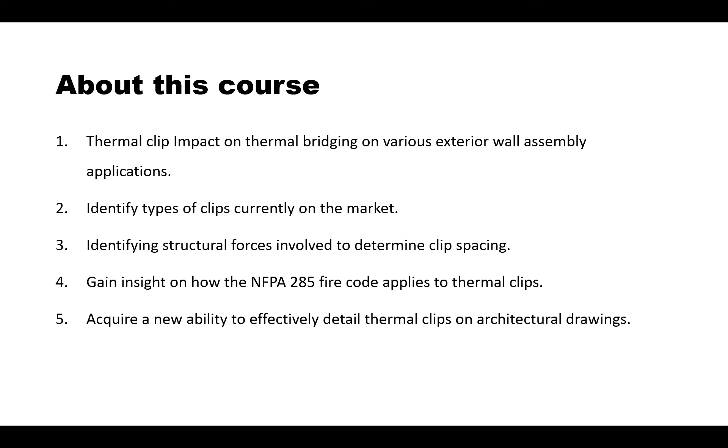My name is Bilal Khan, and I am an architectural product consultant at Northern Facades. I really like to look at myself as a resource to architects, designers, and engineers with all things related to facades. Given my background, I really enjoy solving problems and getting into the details. I hope you all have a great session through this presentation and find value in the things that we've learned throughout the years.

So I want to start off the presentation with just creating a little bit of context.

88% of energy sources are non-renewable and harmful for the climate. This is just a synopsis of where energy is currently being sourced in the United States. And as we all know, if our energy is not renewable, it could cause adverse climate change effects that we're all experiencing, such as snowstorms in Texas, etc.

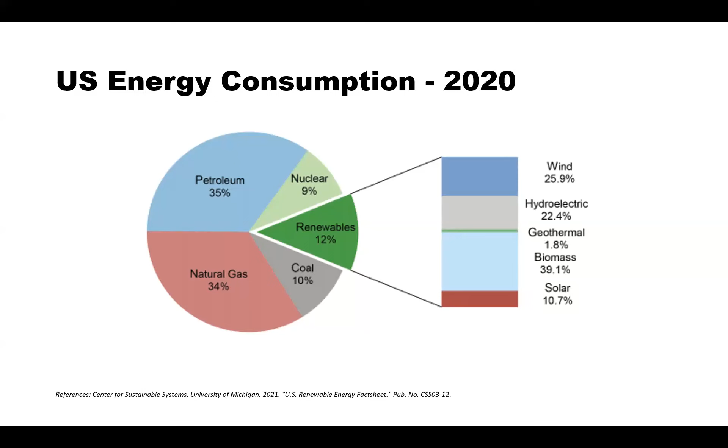Buildings that we live in require energy for all kinds of different things, ranging from cooking and refrigeration, running motors and electrical devices, or even lighting. But the single biggest end use is space heating, which accounts for 42% of residential buildings and 36% for commercial buildings. Commercial buildings also spend $27 billion, or 15% annually, just to heat their buildings.

All of this data is just to create this sense of understanding of how our energy is being sourced or produced, and how we consume it. Given that, we would want to believe that building occupants would be pretty happy or satisfied with the thermal comfort of their buildings, right?

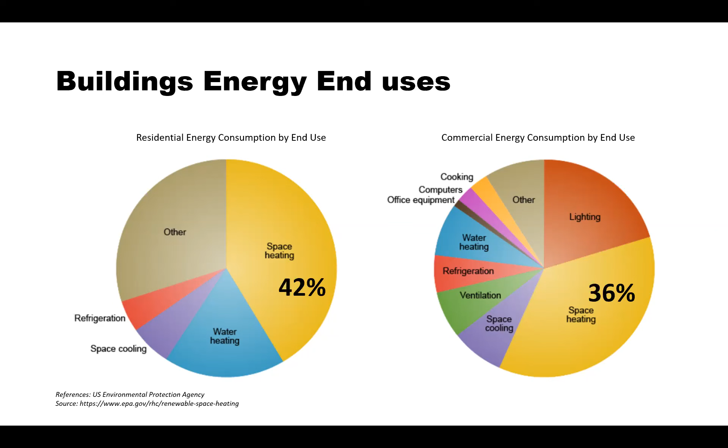However, we stumbled upon a survey that says no, that's actually not the case. Actually, thermal comfort is in a negative or dissatisfied zone. In a study conducted at UC Berkeley, we learned that modern building performance is mediocre at best.

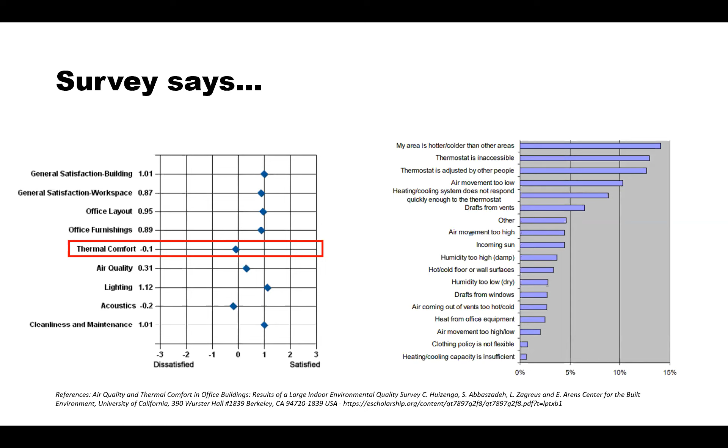If you look closely at the sources of dissatisfaction with temperature, we see opinions like 'my area is hotter or colder than other areas,' or 'air movement is too low,' or 'heating and cooling systems do not respond quickly enough' — all telltale signs of overall failure of the building to maintain temperature consistency. This leads us to believe that buildings are perhaps not performing at the level they were designed to, or if they were even designed to a standard, and that most commercial buildings are experiencing drastic heat loss.

So before we understand how buildings lose heat, we need to understand TEDI, or thermal energy demand intensity. TEDI is a measure of the amount of annual heating energy needed to maintain a building's stable interior temperature. It takes into account heat loss through the envelope and passive gains such as warmth generated by sunlight, body heat, and appliances. By targeting low TEDI, designers can focus on passive solutions like good insulation, air tightness, and beneficial sun angles that can help reduce energy used directly.

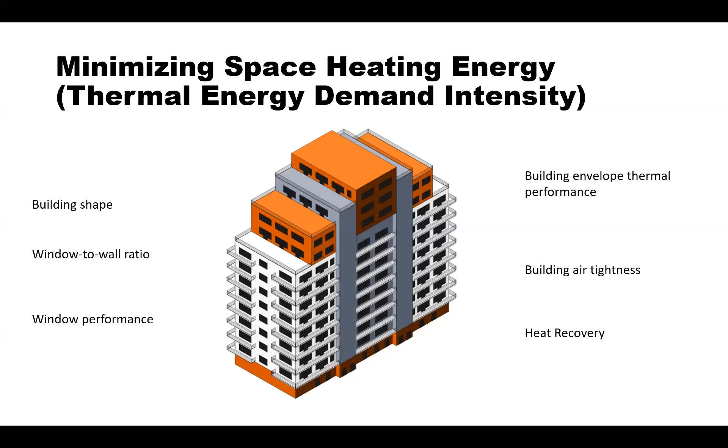Looking at these passive design aspects is always the first step in high performance design. To minimize heat loss from buildings, it's very important to design highly insulated buildings and building assemblies, with more exterior insulation or split insulation in wall cavities. But either of those two strategies fail if we fail to recognize the impact of thermal bridging across the building envelope.

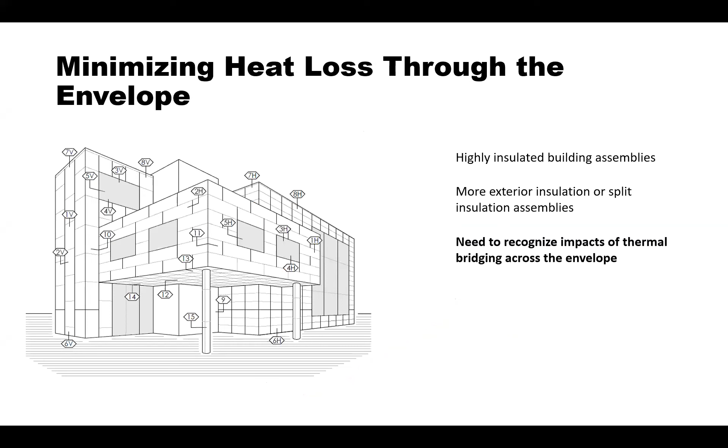So let's take a closer look at what thermal bridging entails. This is mostly a refresher, as I'm sure everyone present at this webinar knows what thermal bridging is, but for context: a thermal bridge is an example of heat transfer through conduction, plain and simple. When there is a temperature difference, heat flow will follow the path of least resistance through the material with the highest thermal conductivity and lowest thermal resistance. This path is a thermal bridge.

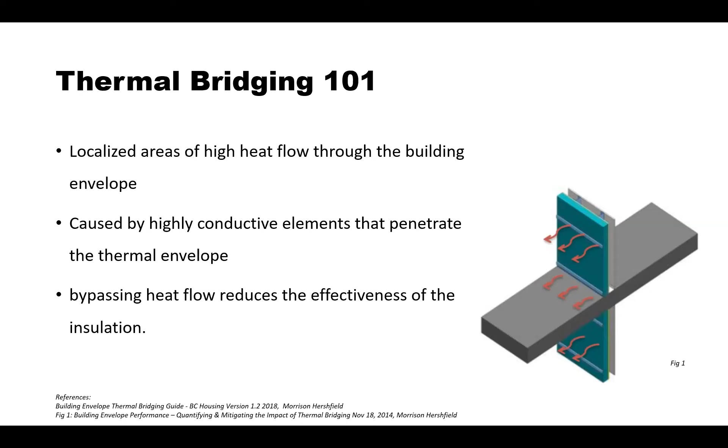Thermal bridging is caused by highly conductive elements penetrating the thermal insulation, or misaligned planes of thermal insulation. These paths allow heat flow to bypass the insulating layer and reduce the effectiveness of the insulation.

Thermal bridges can occur through walls, roofs, and other insulated building envelope components through linear transmittance of floor slabs, through point transmittance of structural elements, and clear field assemblies — that is, transmittance which occurs due to the effect of uniformly distributed thermal bridging components like brick ties, structural framing, products like steel studs or studs in general, and cladding attachments.

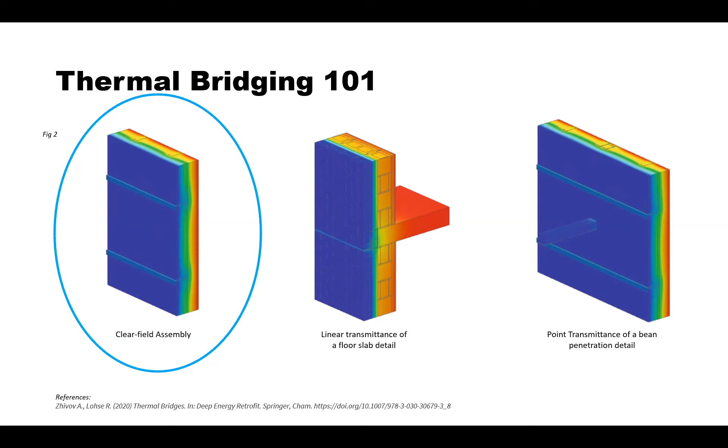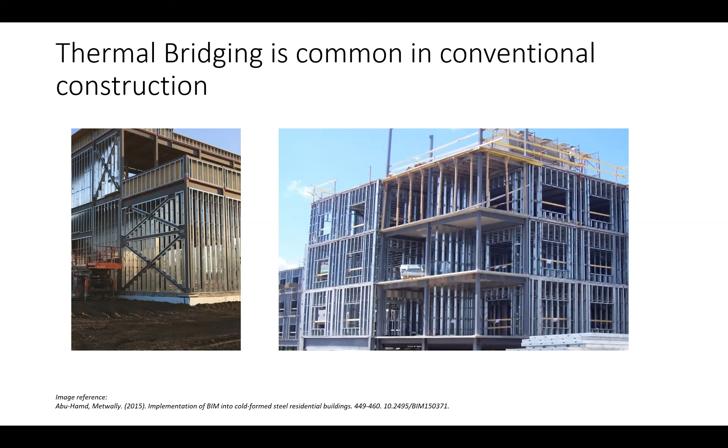This presentation is going to focus exclusively on thermal bridges created through a clear field assembly. Thermal bridging is common to many forms of conventional construction. Prior to detailed studies of thermal bridging in building enclosures, assembly designers did not necessarily pay attention to heat flow by conduction through steel studs and reinforced concrete structures that did not benefit from continuous exterior insulation. One of the best ways by far to suck energy across the wall is a steel stud.

Just look at the configuration. It's a highly conductive material that's designed for maximum absorption on one end and maximum emission on the other end. And it really doesn't get any better than this for heat loss or heat gain.

Whether this assembly is insulated internally from a thermal perspective is irrelevant, as there are studies conducted where we see steel stud walls with no stud cavity insulation compared to a wall with cavity insulation. When we compare them, you would not be able to tell the difference in thermal performance between the experimental area of measurement. Hence, the case made for exterior insulation has more legs to stand on than we think.

Here's another look at the thermal bridge. Now you can see how the path of thermal transfer goes from the steel studs from the inside of the building via continuous Z-girt. And the only way efficiently and effectively to minimize this heat loss is through installing continuous exterior insulation.

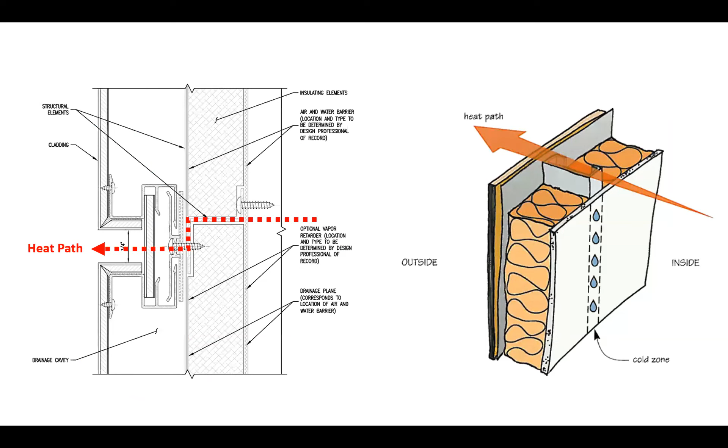As thermal bridges can occur throughout the building envelope, one strategy to combat them is continuous insulation. And this is not just your standard procedure of cutting insulation to tightly fit into the walls and taping them together, though this is an important measure to ensure insulation's effectiveness. Continuous insulation is installed on the exterior side of the walls, so it isn't broken up by wall components, except for service openings and fasteners, as it's allowed for in the building code.

In multi-story buildings, interior insulation cannot be continuous. I mean, that's something that we've learned over the years through perhaps many experimentation.

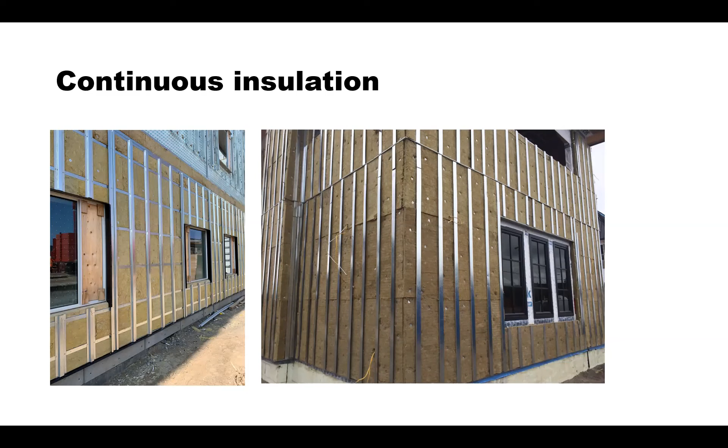So let's break down the concept of continuous insulation. Insulation is measured in R values or resistive values. A section of any insulation is roughly 3.1 R per inch, and this is a nominal value, meaning it's the R value without it being installed in a wall assembly. But what designers need to consider is the effective value, which considers the R value of the insulation after it is installed in the wall assembly and accounts for penetrations and other thermal bridging components that are penetrating it.

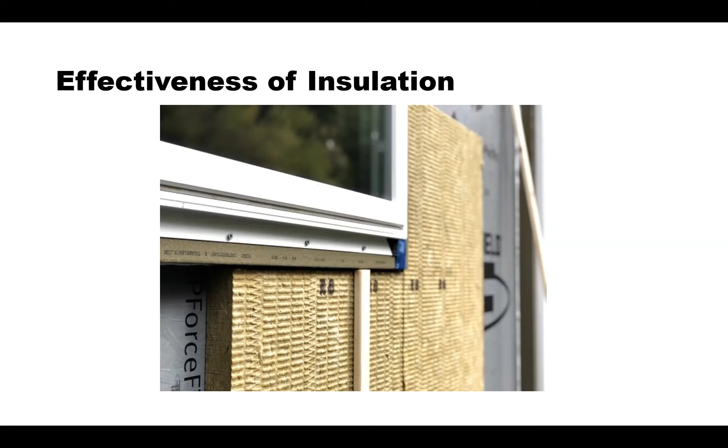So let's take an example of 6-inch batt insulation, which is rated R19 nominally, roughly 3.1 per inch. However, as soon as we add steel studs through this, its performance diminishes to as low as R7.1, which we call the effective R value. This means that with steel studs, designers would have to add around 3 times more insulation to bring it up to its R19 value, which poses some serious design challenges within the stud cavity, as you can imagine.

So we resolve this with exterior insulation, where as soon as we add continuous insulation on the outboard of sheathing, we can get an effective R value of roughly 23 or even more, depending on how much exterior insulation we want to layer up. And we can get a higher performance wall, provided that it is thermally broken through a cladding attachment strategy.

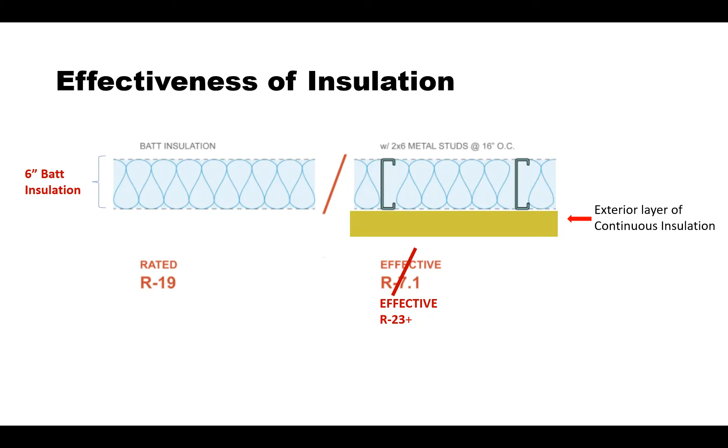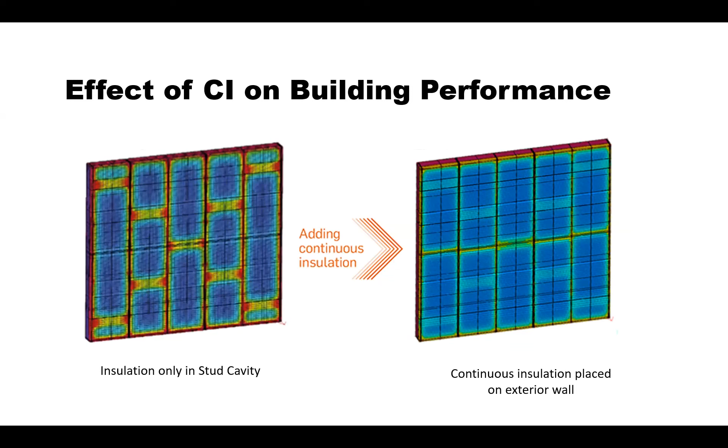Addressing thermal bridging is important during the design detailing stage because it can result in increased energy required to heat or cool the buildings to accommodate for winter heat loss and summer heat gain. As we all know, energy conservation is a hot topic as building codes are increasingly becoming performance oriented.

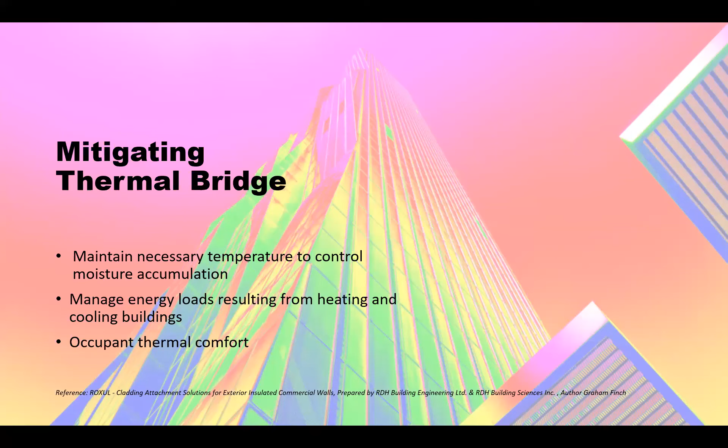So let's just take a little bit of a stroll into the building codes and see why it's so important for us to consider thermal bridging in exterior building envelopes. In the USA, there are two predominant building codes, the IECC 2021 and ASHRAE 90.1.

There are different versions and adaptations of these codes and standards in effect across different states and cities in the USA. However, all require consideration for thermal bridging and effectiveness of insulation, or at least are moving in that direction. On top of that, there are green building codes such as ASHRAE 189.1, IGCC, and voluntary programs like Passive House, LEED, that raise the bar even further for high performance building envelopes. One thing to note is that wall effectiveness, R value, and U value are an integral part of energy code compliance.

Outboard continuous insulation presents an efficient and cost-effective method to meet thermal performance set out in these standards. However, the effectiveness of this approach hinges on the selection of a thermally efficient cladding attachment strategy and detailing, which we will get to in a minute.

Another thing to note is that cladding attachments can be significant thermal bridges if they are not thermally broken, and can reduce the exterior insulation performance as little as 5 to 10% in high performance systems, mechanical or otherwise, and as much as 80% for poor systems that are in need of major retrofit.

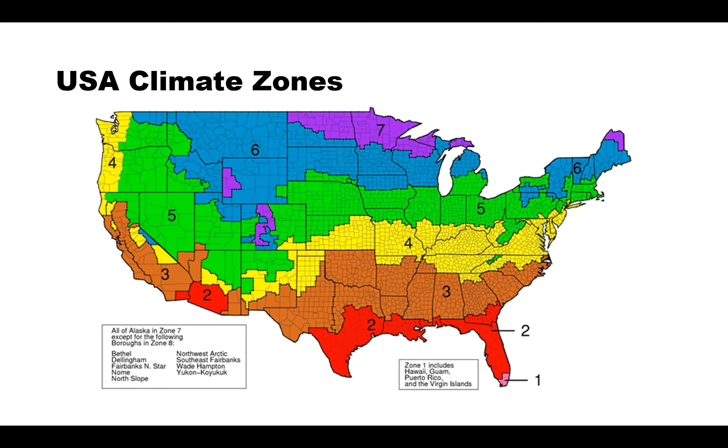And numerous updates have also been made to better align ASHRAE 90.1 to the current code, and these changes include updates to roofing assembly performance and above grade wall assembly performance through continuous insulation.

And with the way the R value or the performance criteria has increased via IECC 2021, it's very difficult to just achieve R values or performance criteria within stud cavity insulation alone. And if it has to be exterior insulation, it needs to be with a proper cladding attachment strategy. There is no doubt about that.

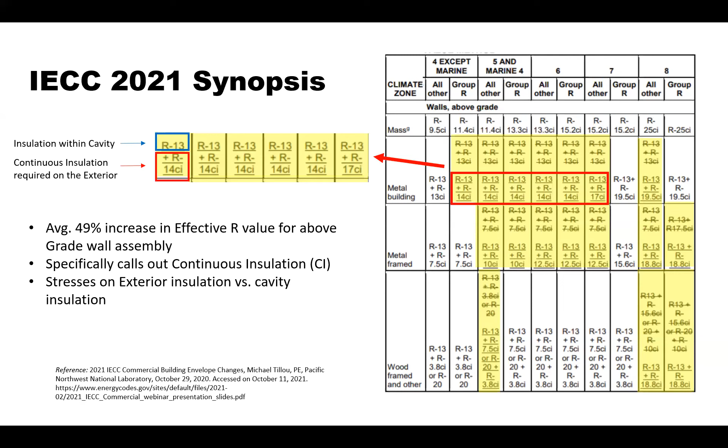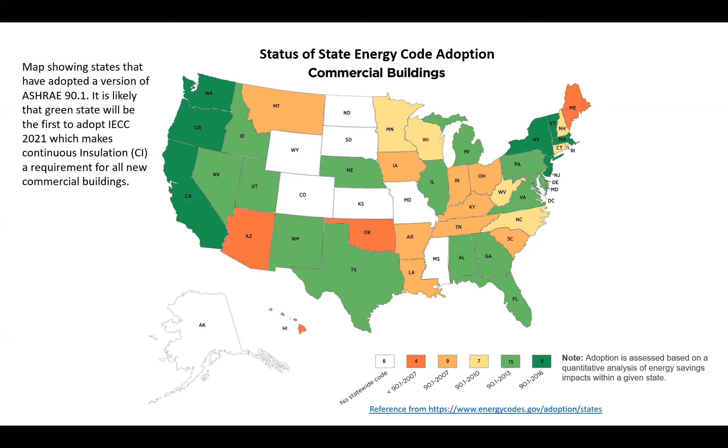The status of energy code adoption in commercial buildings is very rapid from the standpoint that we are looking at it, and there are many states that have already moved on to the ASHRAE 90.1 code, the 2016, which is the latest version. And most states are slowly and gradually moving towards that standard as well.

And as requirements for energy efficiency become more demanding, the primary role of the enclosure is becoming recognized as the most cost-effective means of attaining high-performance targets.

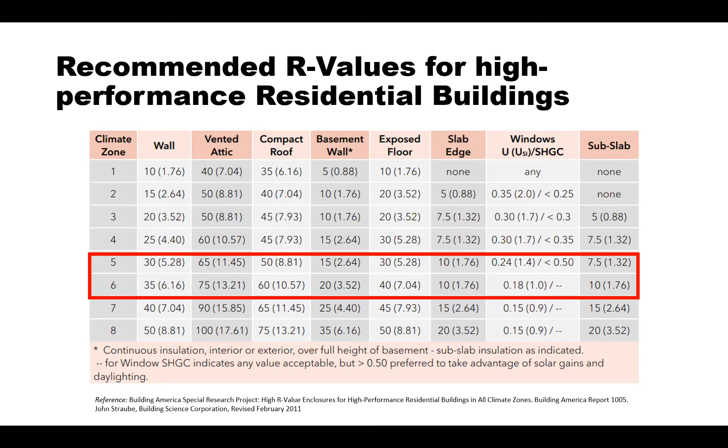The table here indicates recommended effective R values for various enclosure components for use in residential buildings. These are effective R values that account for thermal bridging effects.

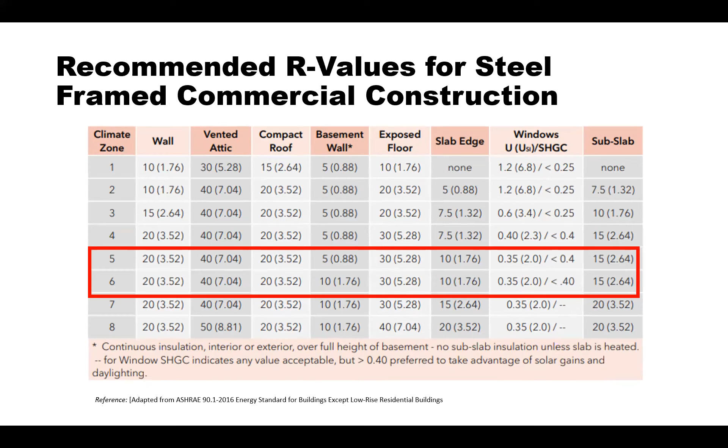The table here indicates recommended effective R values for various enclosure components for those used in steel stud, commercial construction. These are, again, effective R values that account for thermal bridging effects.

The challenge designers and contractors face is in selecting and evaluating an appropriate cladding attachment strategy for their project, and understanding the implications these decisions have on effective thermal performance, installation methods, sequencing, and system cost.

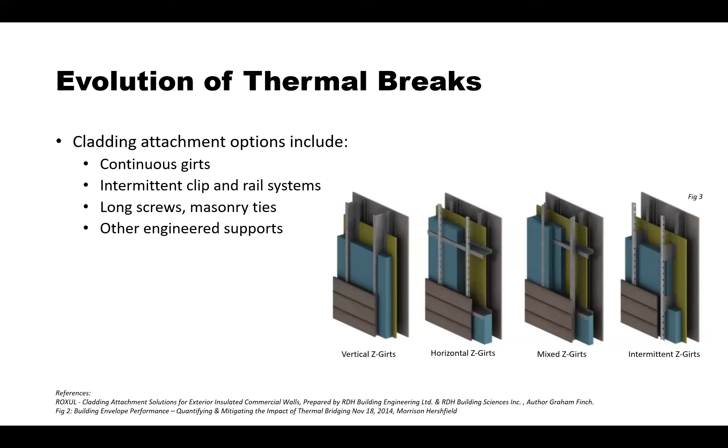These are just a sampling of the different products that are out there. So as you can imagine, there are several different products, all having their own pros and cons, their own acceptable standards, and the way they're probably better or worse in a given situation.

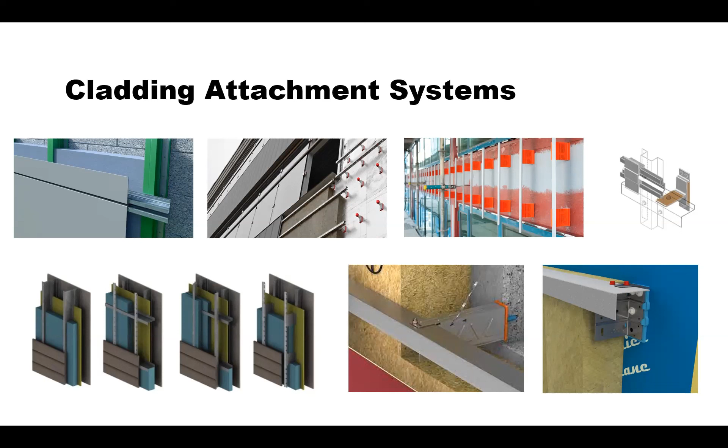But what's really consistent across the board is that all these systems work on the principle of enabling a thermally broken subframing system that enables continuous insulation. The nuances of each system vary by detailing, installation techniques, and system cost, which we'll get into in a little bit.

Typically the thermal break is buried within the insulation layers, which stops the heat flow from passing on to the subframing, and it prevents any cool air from transferring into the building.

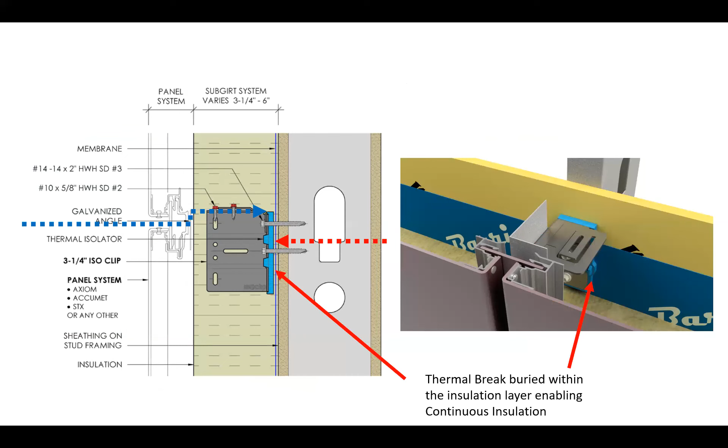And as I mentioned, there are so many different clip and rail systems on the market. Which ones should architects focus on, or what's the criteria to even start to evaluate them?

So I want to start with the point that all clip systems aren't the same. They all have different nuances. And how do you pick, or how do you start selecting them?

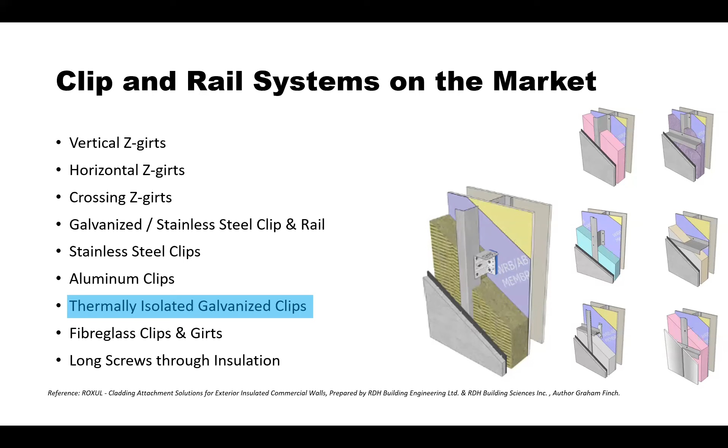Well, there are independent analyses, such as this one that I'll go through by independent engineering company RDH, that evaluates system performance and design performance of many of these clips, and there are many others that are out there. It looks at structural strength, and it looks at thermal performance. Different materials and different combinations of materials all have a play on the performance of the building. And it's really up to the designer, and up to the project standards, to determine which clip would be most appropriate for detailing the type of cladding attachment system that the designers want at the end of the day.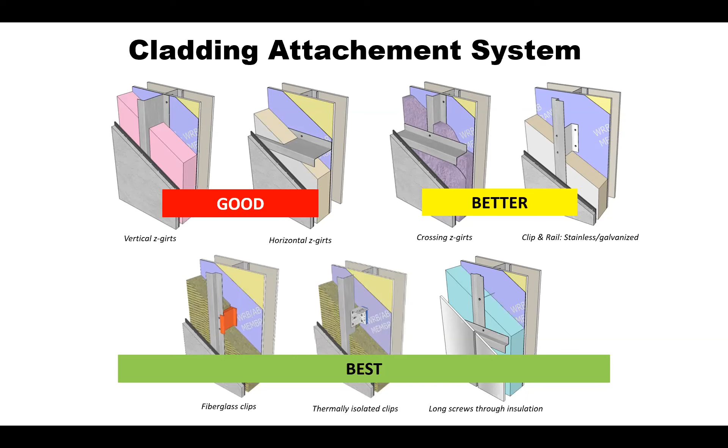The analysis that RDH came up with is that from a starting point, having a thermal bridging strategy in place is a good thing. But within that, there are good, better, and best solutions that are out there. You'll notice that there are various systems and performance is quite relative in the best category.

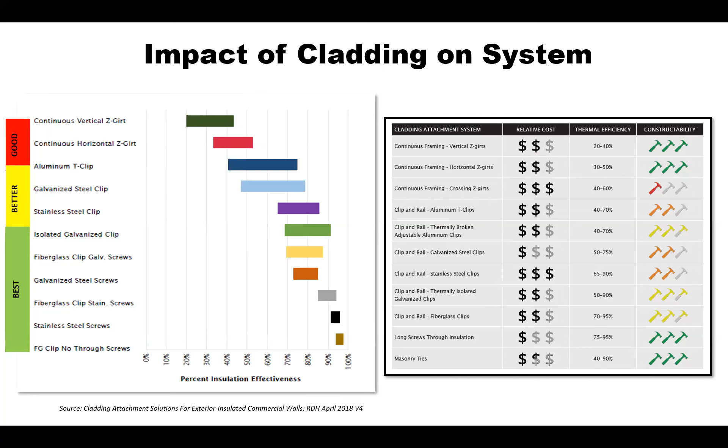Is it a fast-paced project where there are prefabricated wall panels and they really need the building facade up in 3 months? Or is it a custom residential project that requires very extensive and elaborate cladding system, or a versatile cladding system that's adjustable. So those are all dependent on the project specific criteria.

The table here shows the percentage effectiveness of exterior insulation with various cladding support systems, and the typical thickness of exterior insulation, roughly from 2 inches to 8 inches, that goes from R8 to R40 in R value. It is apparent that traditional techniques such as Z-girts can at best achieve about 50% of exterior insulation effectiveness, essentially requiring us to double the thickness of exterior insulation to achieve an effective thermal resistance that approaches the nominal value.

High performance buildings require high performance enclosures that manage heat flow effectively. The proper selection, arrangement, detailing, and integration of the enclosure components and assemblies to maintain the continuity of thermal insulation and the air barrier system are no longer best practice, but a standard practice, and needed to be complied with the codes and the standards.

I'm not saying that it's a big deal, but it is a pretty big deal.

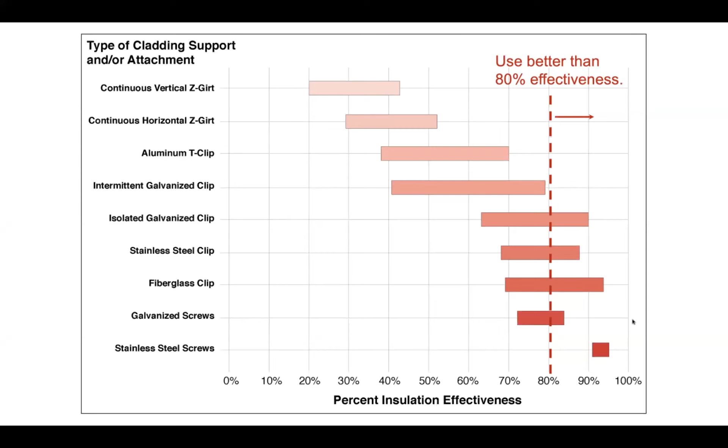Just looking at some high performance buildings here, from a hydrothermal perspective through thermal imaging, in this image, before the retrofit, the building's leaking severe excessive amounts of heat, and you can see that the entire building envelope is just completely lit up.

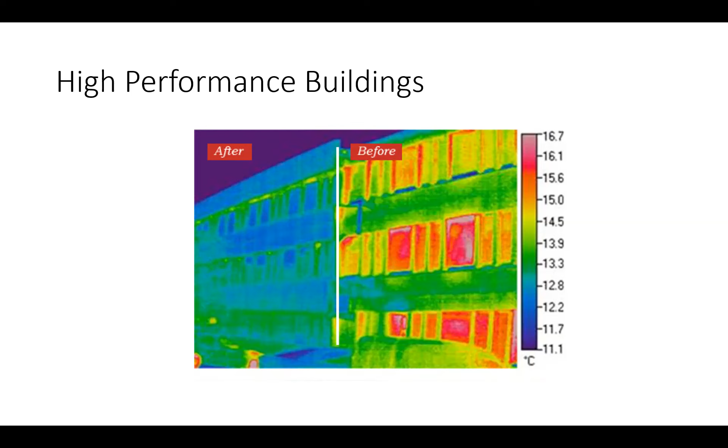Whereas after a retrofit of the exact same building, you will notice that heat is not finding a lot of opportunities to escape through the building facade, which is quite interesting and a very real analysis of what high performance buildings look like and what continuous insulation can do for making that building high performing.

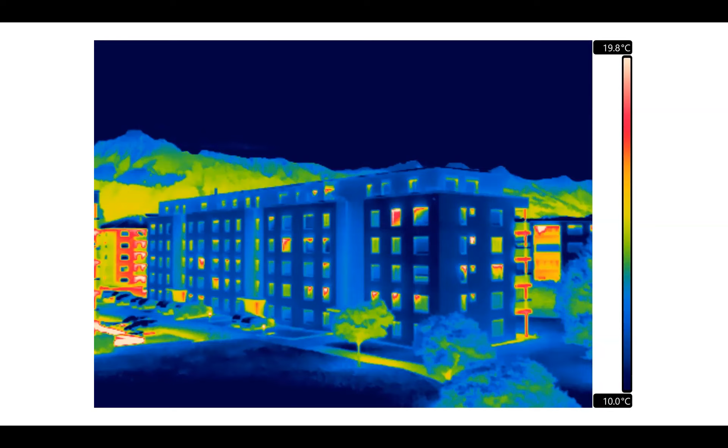But if you look at the buildings on the further left or the further right, you'll see that those are not high performing and therefore are leaking excessive amounts of heat.

Thermal insulation and the control of moisture is practically a universal requirement for buildings, the importance of control of heat transfer tends to become more critical as the severity of climate, either hot or cold, increases. Managing heat flow is critical to occupant thermal comfort, energy efficiency, durability, and increasingly thermal resilience during periods of extended power outages as we continue to experience as climate change takes effect.

The primary impact of a thermal bridge is that it will allow conditioned air to leave the building, losing heat in cold weather and gaining heat in hot weather. This may have a significant impact on the comfort of the occupants, not just the overall temperature that they experience, but also when they touch the colder or hotter than average walls and floors.

If your building must maintain a certain temperature, whether it's room temperature for people or a specific temperature for stored goods, a thermal bridge can make it more expensive to maintain that temperature.

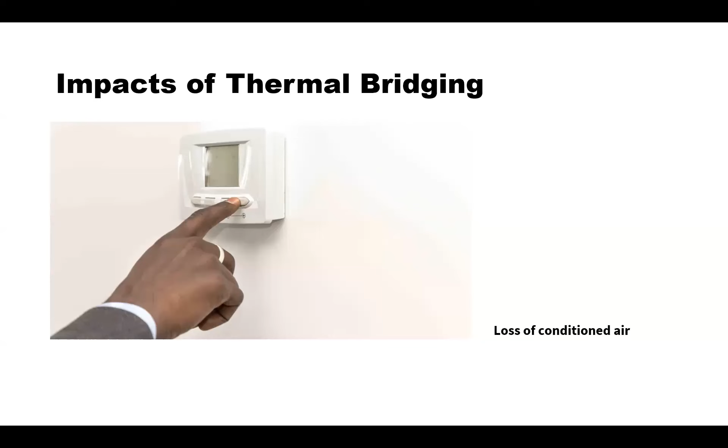Thermal bridges allow for warm air to mingle with the colder air. They frequently encourage condensation. This effect is more pronounced in areas with high humidity than in areas with relatively low humidity. When condensation occurs in a building, it has many effects on air quality.

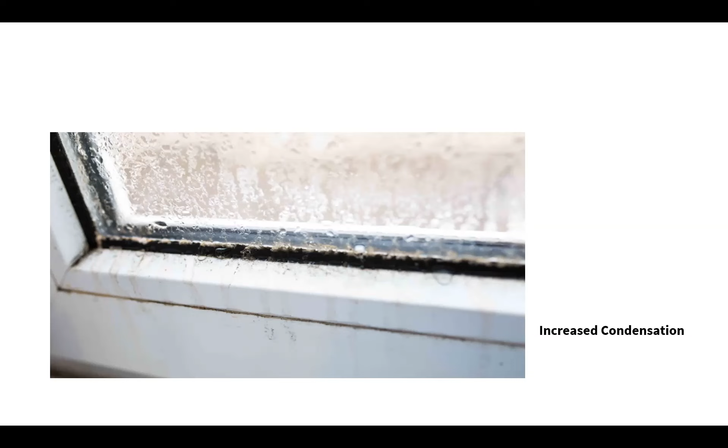It could allow for mold to grow and negatively impact the health of building occupants, especially those with breathing problems. Constant dampness may cause damage to drywalls, furniture, and other items.

Probably the biggest and most expensive gremlin of all is interstitial condensation. From a thermal bridge standpoint, it may not necessarily end up on the exterior of the building. Instead, it may just collect in between the walls and other building elements, and it has some serious impacts on the longevity of a building. Wherever moisture collects, rot and rust may follow.

So if you cannot see the condensation because it is in the walls or pipes, you may not be able to fix it or address it in time, and it would have caused severe damage to the building structure.

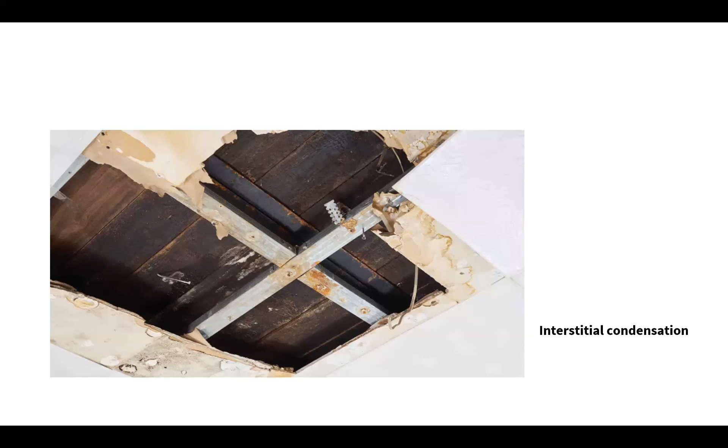In climates with a cold season, it is advisable to place all of the insulation on the exterior of the air leakage control plane to manage the risk of condensation due to air leakage. However, this makes energy efficient walls very thick. An alternative approach is to combine interior and exterior insulation in proper proportions to manage moisture.

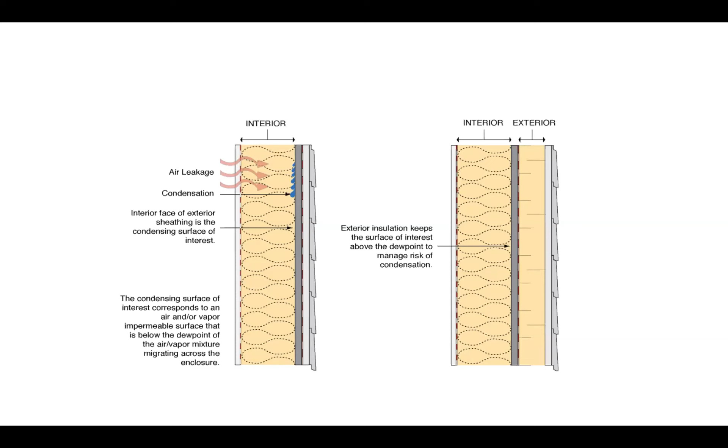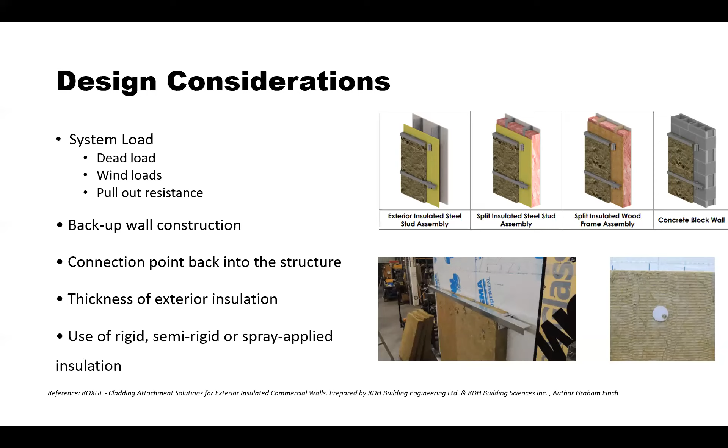There are several considerations which must be made in choosing the type of exterior insulation and cladding attachment strategy for a building. These typically include, at a minimum, different loads—dead load, wind load, or pull-out resistance—backup wall construction (whether wood, concrete, concrete blocks, or steel stud framing), structural attachment point (whether through studs, sheathing, or slab edge), outboard insulation thickness, and types of insulation.

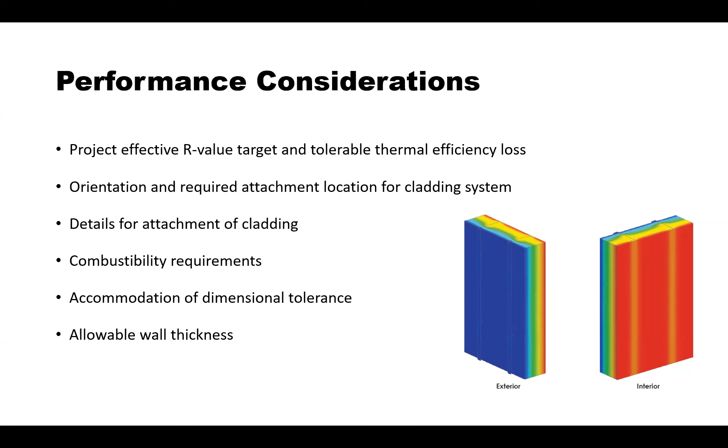But in addition to these requirements, there are performance requirements that come with new and ever-evolving standards and codes, which ask questions such as: what is the effective R-value target and tolerable thermal efficiency loss from supports? What is the orientation of the subframing system—vertical or horizontal—and what are the required attachment points? It is important to consider details for attachment of cladding at corners, transitions, returns, and penetrations, and combustibility requirements.

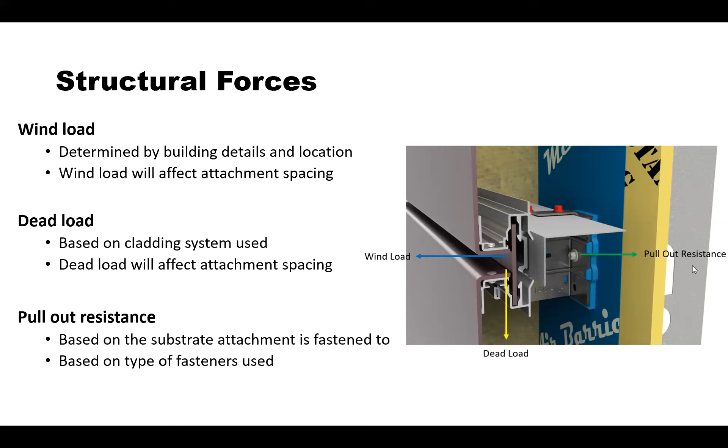Spacing of the attachments has many different implications, and each product has different load charts. Each manufacturer has different load charts that designers and installers can rely on, and these variables are broken down by wind load, weight of the cladding system, the type of girt assembly required, the substrate the system is fastened onto, and the depth of the insulation.

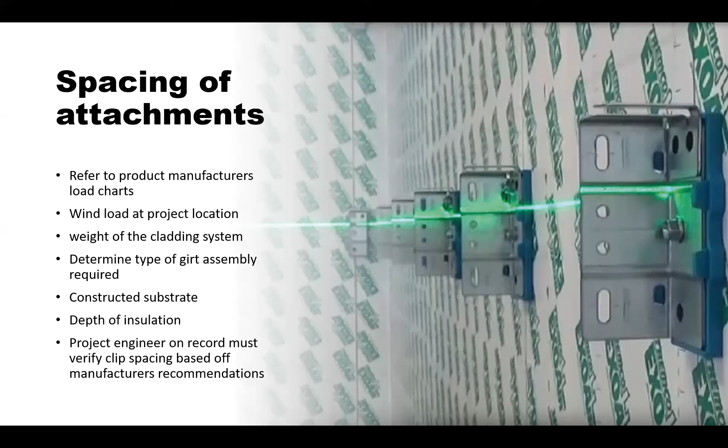However, the project engineer on record must verify the clip spacing based on the manufacturer's recommendation and sign off before anything can be done. This is just an example of a typical load chart and the type of data you can find from manufacturers.

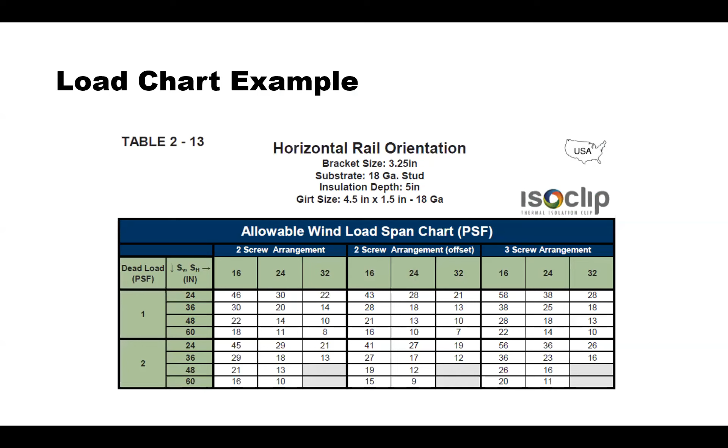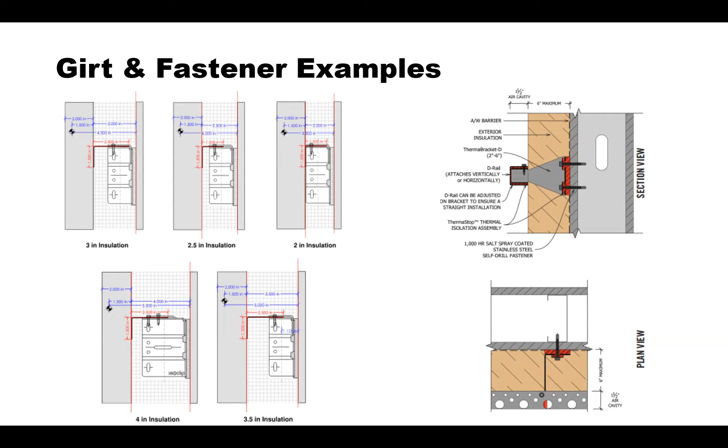Depending on the thermal attachment, there are many different girt and fastener approaches. Some thermal attachments use one type and adjust the girt size to accommodate different insulation thicknesses, while others have different size attachments for different insulation thicknesses. Some products are adjustable and require no shims, while others require different kinds of attachments to accommodate horizontal or vertical insulation. So there are many different flavors—no two thermal clips or thermal attachment systems are the same.

It's important to understand, because we're talking about thermal bridging and the performance of an exterior wall assembly, that the more thermal clips or cladding attachments there are on an exterior wall, the less performing the wall will be, even though it is a thermally broken system. With more penetrations, you'll have more opportunities for thermal bridging.

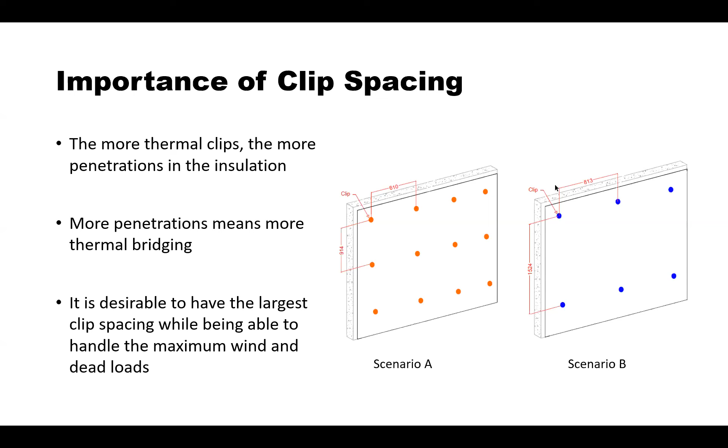So it's also important to understand that the system an engineer or designer chooses is engineered for high load, high capacity that can handle maximum wind loads and dead loads, and can also be spaced much further apart than other systems to optimize exterior wall performance.

And it kind of, again, reminds us how important it is to really keep in mind safety of users and occupants.

So the most important test for determining fire propagation is NFPA 285 in the US. The thing to note about NFPA 285 is that it is not a component test. It is a test of an entire wall assembly and a component. So a thermal clip or a cladding attachment will be a component in the overall wall assembly. And that wall assembly is mounted on a testing rig, which kind of looks like something like you see in this diagram.

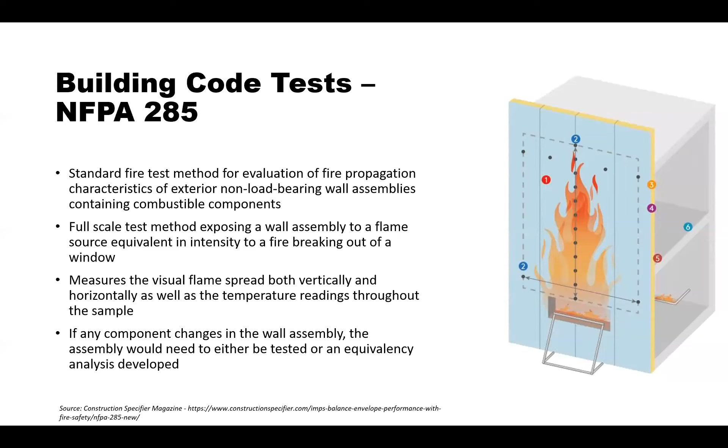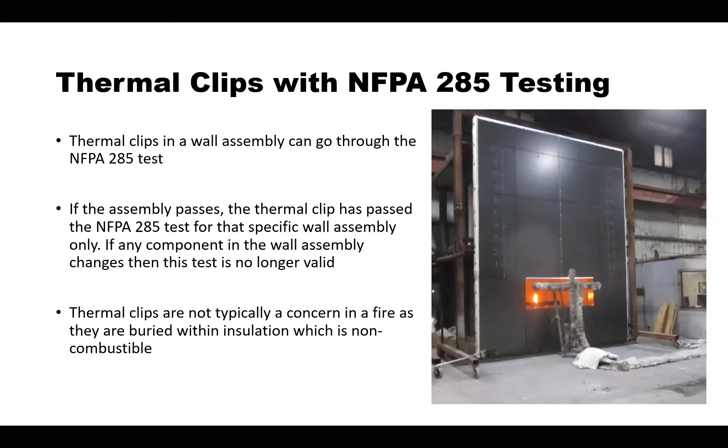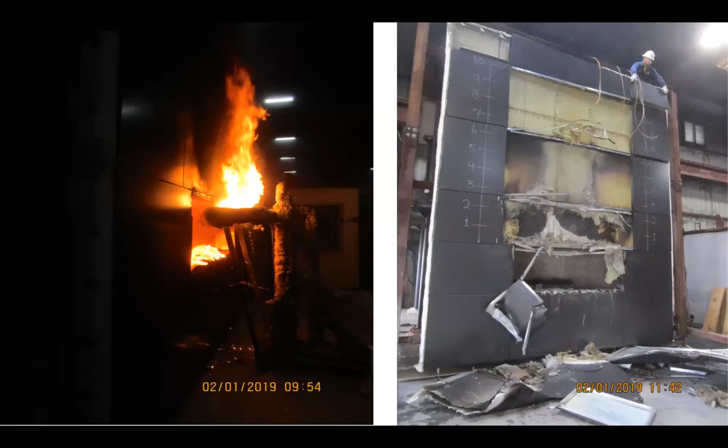The way the test is performed is that a pilot flame is lit on the inside, as you can see in the window, and it increases in intensity. Eventually, this little opening creates the scenario of fire leapfrogging onto the exterior of the building, and the building keeps burning. This raging inferno keeps on going for roughly 30 to 40 minutes.

And what they are trying to assess through this exercise is determine the extent of the range of the fire, the height of the fire, and how the combustible components, if they are part of the building assembly, whether or not they're aiding to that flame or not.

The image on the right-hand side is actually an image of a test where a wall assembly passed an NFPA 285 test, as devastating as it looks. But they really want to gauge through the markings that they have on the left and the right-hand side how high the flame travels in that 30 to 40 minute window.

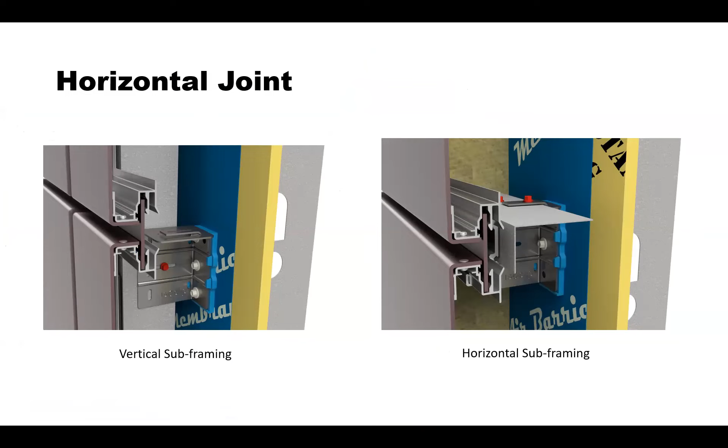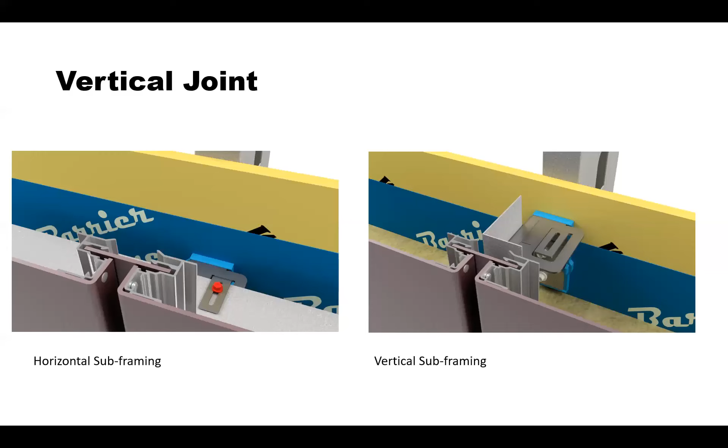So we did talk about details, and I'll go over some details real quick of how product manufacturers can assist and provide value in the design process and are integral to the design process, in fact. And some things that they should typically have are details that are part of their resource books or resource manuals, and you'll find many different details in this presentation that basically talks about different joints, either horizontal or vertical, window head, window sill, window jambs.

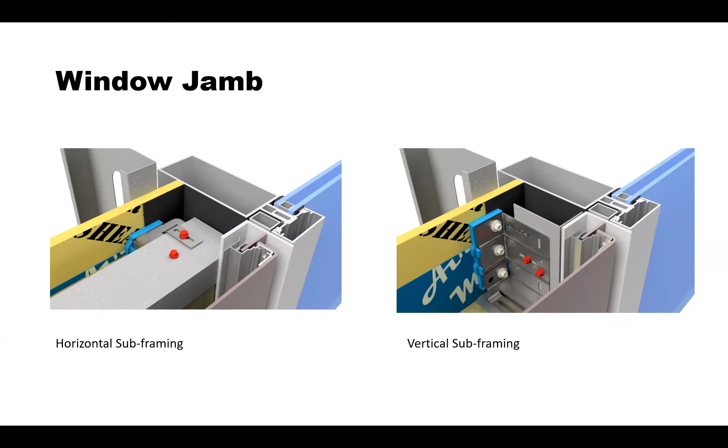And again, the whole idea is for a thermally broken system, at the end of the day, yes, it's creating a high performance wall, but it is creating the subsurface for the cladding product to be installed on. And if that product is not installed correctly, it can ultimately be traced back to the system upon which it's being installed on.

And parapet details and termination details. So there are all these different details that can help designers figure out the best course of action for all the different intricacies of a project.

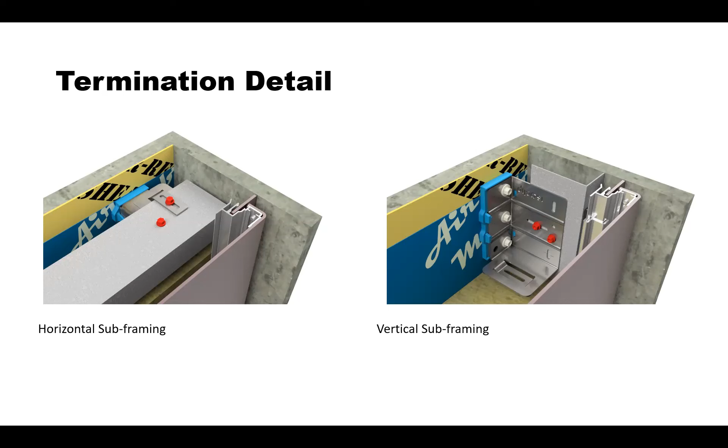So to do a little bit of a recap before I move into talking a little bit about a specific product: energy conservation should be our collective goal. Building codes are challenging designers and builders to adopt high performance methods and products. Energy conservation can be achieved by designing buildings that use less energy. And the best way that we know today as designers is to design with thermally broken cladding attachment systems and continuous insulation.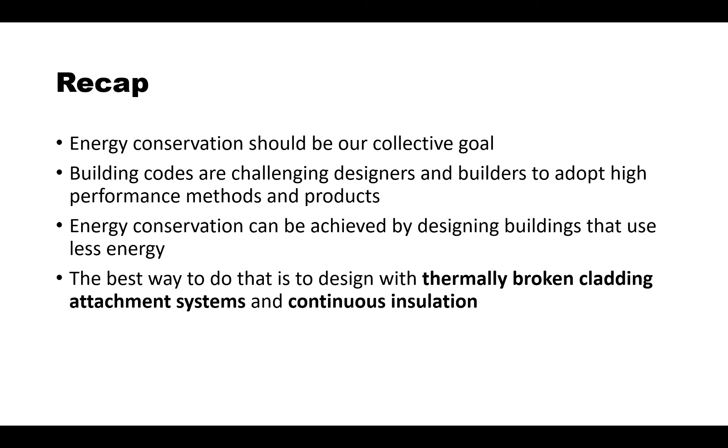We can get into some questions right now, or I can perhaps finish the last couple of slides that I have. Kayla, what do you recommend?

Yeah, so actually I do have one question for you, and that is coming from an individual named Jeb. And Jeb is asking, is this with or without sheathing?

Most cladding systems that are on the market are installed after the sheathing, but they're installed to the structural member. Now that structural member could be the steel stud or it could be the wood stud, but it's installed after the sheathing.

Okay, perfect. We don't have any other questions quite right now. But yep, we're going to have some more, I'm sure, in the next few minutes. So feel free to continue. Okay, awesome.

So I'd just like to take the next few moments here to talk about the IsoClip, which is a product by Northern Facades. IsoClip is a thermally broken structural attachment for cladding systems to the exterior wall assembly that significantly reduces thermal bridging within exterior rain screen assemblies and helps achieve continuous insulation, resulting in improving insulation effective R values and building envelope performance in general.

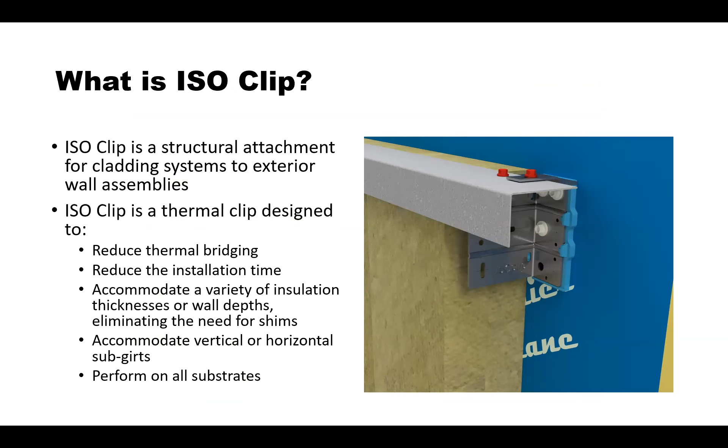IsoClips are available in 3 sizes to accommodate for insulation thicknesses. IsoClip is manufactured from 14 gauge galvalume or galvanized steel with an integrated glass fiber reinforced polyamide isolator pad.

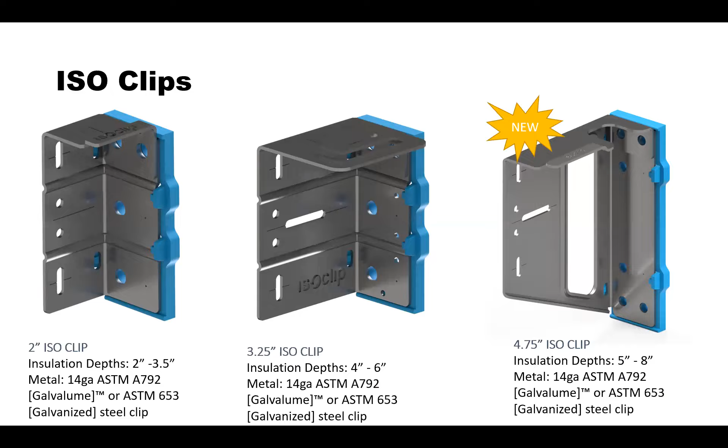IsoClip is an integral product that improves building energy efficiency through a reduction in thermal bridging, utilizing an optimized thermal pad design. IsoClip is designed for high load capacity. Less IsoClips may be required compared to synthetic or aluminum clips, which means less IsoClips to install and less thermal bridging. IsoClip is simple and easy to install and is preferred by contractors and installers for achieving efficiencies during construction, resulting in cost savings.

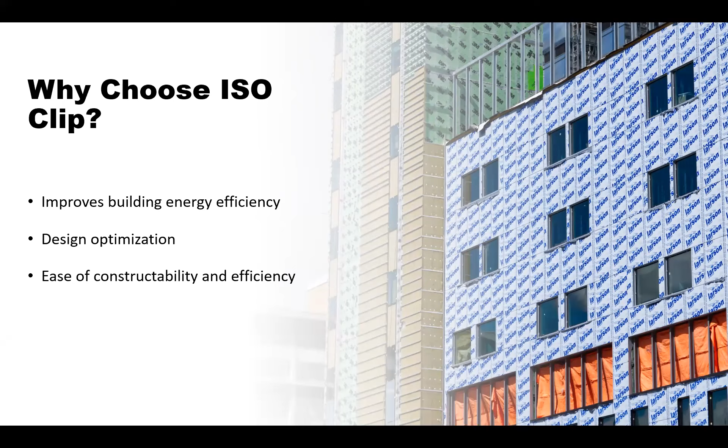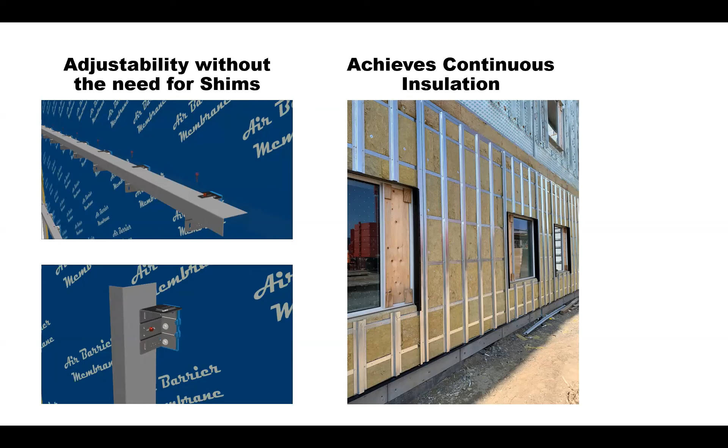Perhaps the best advantage of Isoclip is its adjustability. It is adjustable up to plus or minus half an inch, which is quite significant on an exterior wall, in both directions, horizontally or vertically, without the need for shims. And it helps achieve continuous insulation, which, as we've probably internalized through this presentation, is the most necessary thing.

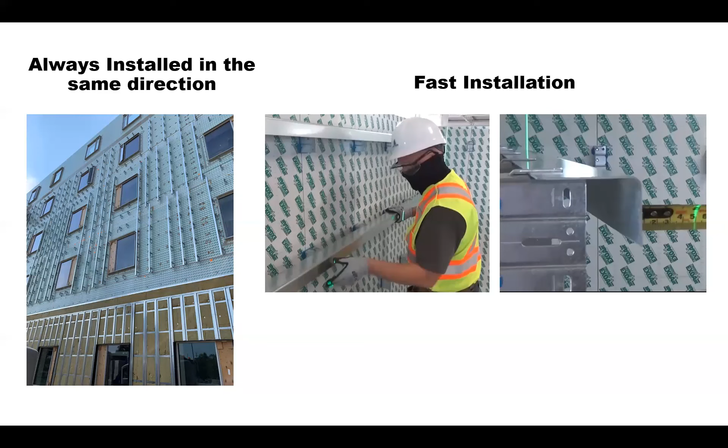To achieve or meet building codes. Isoclip's built-in helping hand is designed for ease and speed of installation, and it's incredibly important considering how crucial it is to meet construction deadlines. Isoclip is always installed in the same direction, regardless of horizontal or vertical girt orientation, and it's North American made.

Isoclip has extensive performance data and meets extensive performance requirements, and has been validated by external engineering consultants for structural and thermal performance. It has been evaluated for NFPA 285 and has been utilized in a successful NFPA 285 test. It is fully engineered and acceptable for multiple substrates.

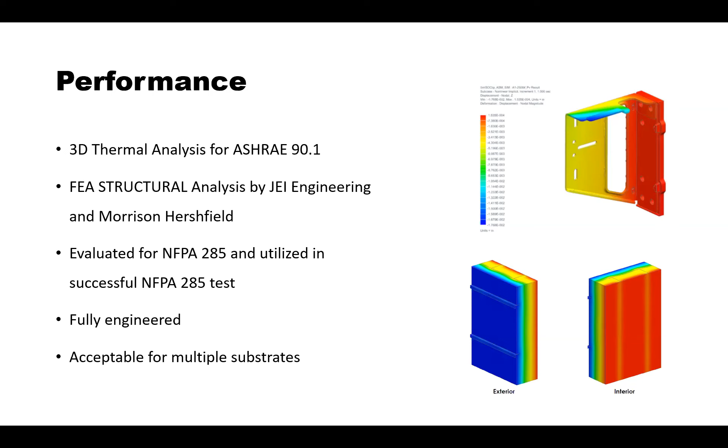Northern Facades is committed to sustainability and ensuring that our products not only meet and exceed specification requirements, but have minimum possible impact to the environment and the carbon footprint. As a component part, Isoclip may assist towards several LEED credit points.

Isoclip can be specified for salmon-safe projects. Salmon-safe is a standard developed in the Pacific Northwest to protect salmon habitats from the disruption of construction activity. In this case, it means any zinc runoff can be detrimental to salmon habitats. So to safeguard against that, our team developed a nylon-coated clip. This allows Isoclip to protect downstream water quality and be consistent for use in salmon-safe projects.

Isoclip is also registered on the Living Future Institute of Sustainable Products, which has provided Isoclip with a Declare label, recognizing that Isoclip is free from any red-listed chemicals and components, and upon the end of its life, is fully salvageable or reusable in its entirety, and it's 100% recyclable.

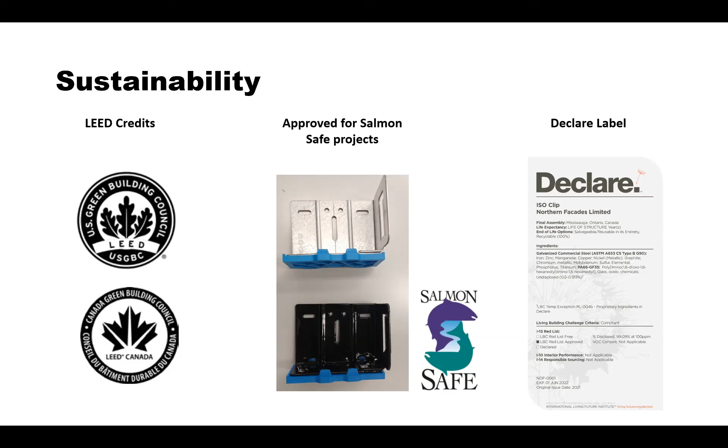Northern Facades has also developed an online tool called the ISO Clip Calculator, which can help designers during preliminary design stages determine wall performance by simply tweaking their wall assembly and selecting different combinations of clips and wall types to achieve the required performance within the cladding, within the wall assembly, and for the type of cladding system and wind load criteria for that specific project. So it's a pretty comprehensive, pretty robust tool.

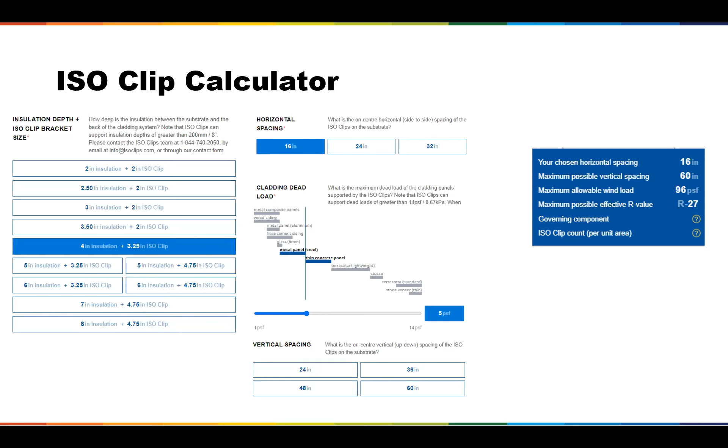And of course, if you find yourself in applications or situations that exceed the parameters of the calculator, the ISO Clip team is more than happy to help.

Isoclip has very extensive technical support. A lot of our product information can be found on isoclips.com. Of course, the Isoclip structural calculator is something I just touched on, but a lot of our technical information is found in the box link. Feel free to reach out and I'll be more than happy to share that.

All technical questions can be referred to info@isoclips.com, and Isoclip is also listed and can be found on leading specification platforms. And that is all from my end.